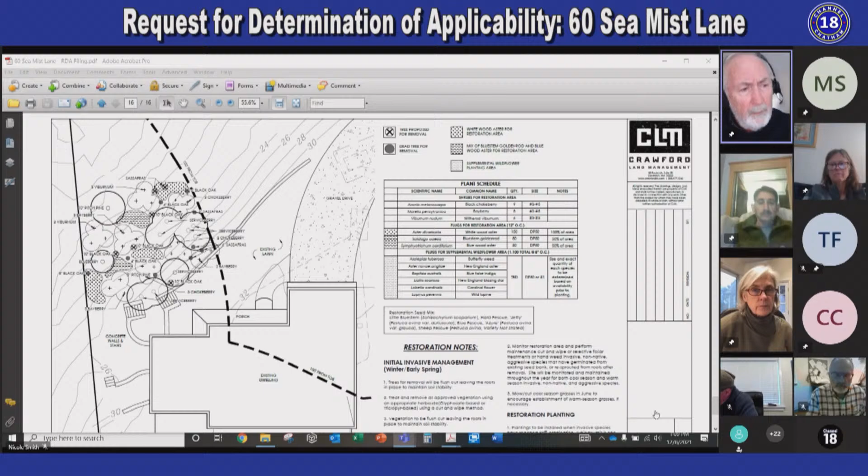I don't know, will we need to do this? I guess we don't need an RDA with any sort of conditions, or do we? I can't think of any.

I would say not. Okay, Bob. I'd like to make a motion that we approve a negative determination for 60 Sea Mist Lane.

Second. Thank you, Karen. Roll call vote. Bob, aye. Janet, aye. Karen, aye. Mary, aye. And I vote aye as well, and that is approved. Thank you very much, in record time too. Bye.

Next up, we have the request to amend an order of conditions for 571 Old Harbor Road, John and Amy Rhinelander, map 16H, parcel 44-C2, SE 10-3499. Proposed construction of a deck, pergola, and stairs. This is phase 1, so they're just asking to be able to file an amended order. We shouldn't spend much time on this. I will share the plan, and this is a George Riley filing.

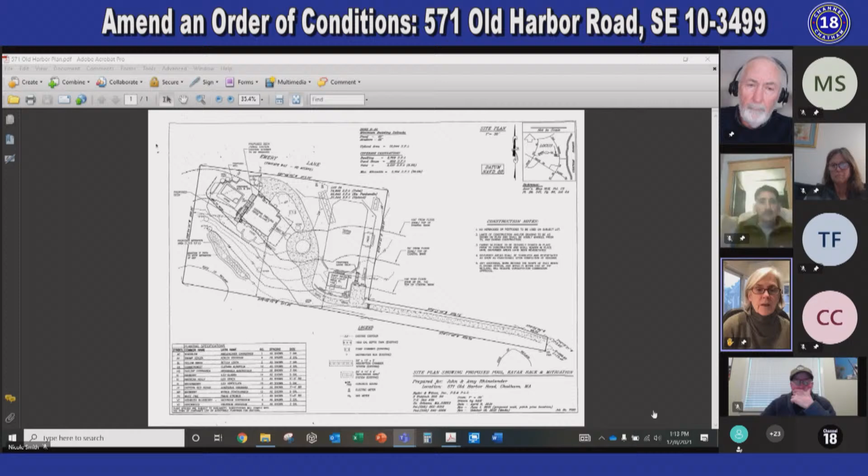Janet: I'll just note that I saw that increase and had the same reaction to it, but that's something we'll get into at phase 2, whether they'll be. Nikki just indicated that they're going to file a variance, I presume, for that increase, so we'll deal with that down the road. It just strikes me looking at it that it's well within the scope of the existing order of conditions, so let's have them move to the next level.

All right, so I think we can just go ahead and vote them on through to the next phase. They have to file, so it's up to them. I don't think we need to vote really. Well, I guess we have to approve that they can file an amendment. We have to approve phase one.

Okay, I'd like to make a motion that we approve phase one for an amendment to the order of conditions for 571 Old Harbor Road. Second. Roll call vote, Bob, aye. Janet, aye. Karen, aye. Mary, aye. I vote aye, and that is approved for phase one.

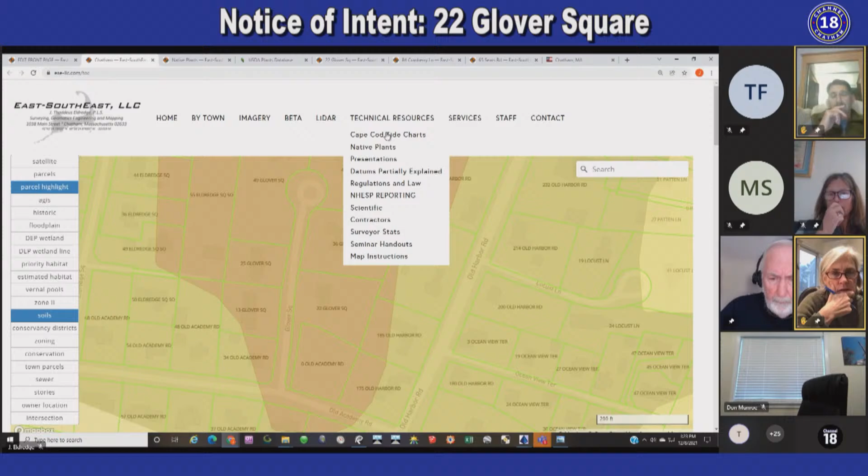So we do know we have some heavy soils out here. There's a patch of silt loam, all in the orange. Oh, I see. Well, the whole property is in that. The purpose of the drainage ditch is we don't get good flow out here. And that comes from the north and drains all the way down to this wetland. That's right through an area that's very silty. There's another perched wetland that's across Glover Square. So it's yeah, lots of clay, lots of silt.

So where does the drainage pipe start and stop? I saw the reference on the site plan. How's it expressed on there? The end of the pipe was located, and top of the drainage pipe located. So we recovered the pipe at the ditch to the north. I see, that's the top of the pipe here. We didn't spend enough time in the woods near the swamp finding the end of the drainage pipe. Right, everything's functioning right now.

So why do you want to replace it? It's an old metal pipe and it's showing signs of deterioration. The neighbor is most concerned that if it does deteriorate and then we get some rain, will he be flooded because this becomes a virtual dam? Yeah, the applicant sees this as the prime opportunity. If we have machinery there anyway, let's fix it.

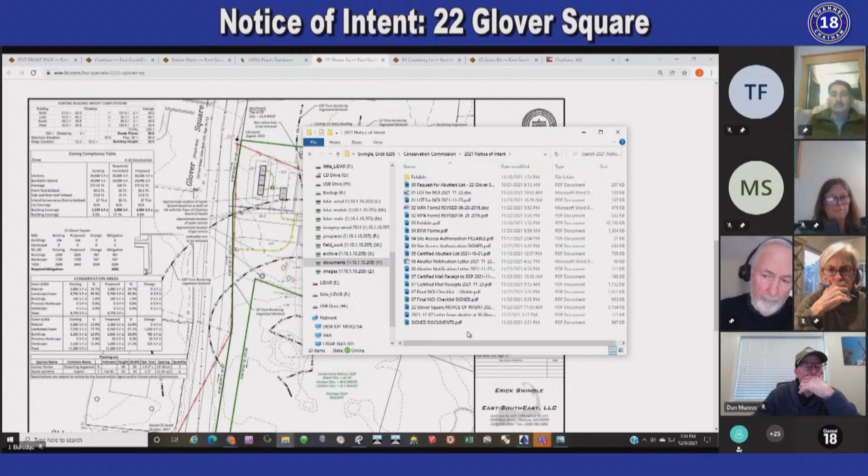Sorry, I'm looking. Well, I'll read it into the record, and then I'll get a copy of it. Oh, Nikki has it. No, now I do have it. It's pretty short, so I think we should just go ahead and read it. Would you like to have it? I don't know, I was hoping Nikki can do it. Go ahead. Oh yeah, because I'm just looking. I can do it, yep.

To whom it may concern, my name is Damian Webby, 36 Glover Square. My wife Charlene and I do not have a problem with our neighbor's project. We do, however, have a concern with the covered marsh drainage ditch in the backyard. Our concern is the drainage piping with the construction and the digging of 4 new plantings. We don't know what material was used for the piping and its possible state of fragility. A lot of water flows through the system, and a blockage would create flooding. Sincerely, Damian and Charlene Webby, 36 Glover Square.

Right, so Thad, just to summarize, what's going to be your approach to the pipe as you do the project? We want to take a look at it, run through a few numbers, and then return to the commission with probably an amended order of conditions to do something with it, either replacing it with a more sturdy and longer lasting pipe, or opening it up to a ditch.

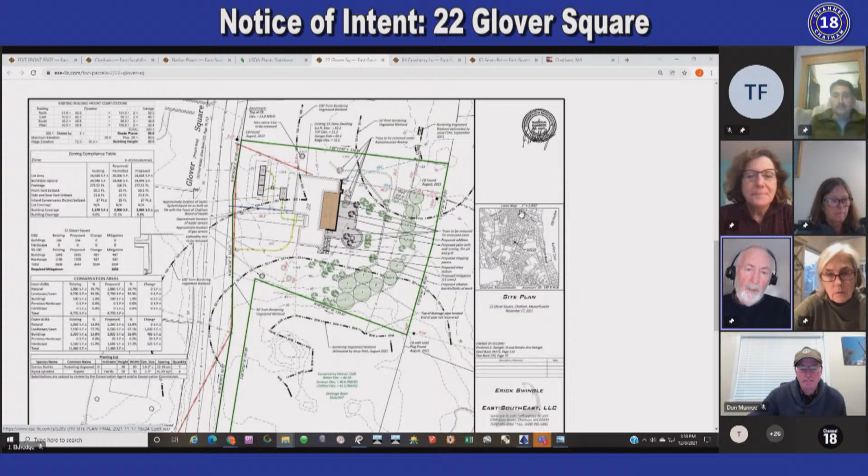The next order of conditions is 84 Cranberry Lane, Jeffrey A. and Susan L. Kittrell, map C, parcel 25-G21, SE 10-3521. Addition to a single-family dwelling, removal of stairs, and part of deck.

Good afternoon again. Thad Eldridge, East Southeast. The Kittrells are looking to add an addition onto their home on Cranberry Lane. The existing property has a salt marsh system against Sulfur Springs, a velocity zone coming onto the property, and an A zone up to a slope that constitutes a coastal bank. The entire property is within jurisdiction, and most of it's within the 0 to 50. So the Kittrells are looking to put a modest addition on their home that doesn't trigger full FEMA compliance.

This would be less than 50% the value of the current home. It would be an extension of their family room. Instead of the existing deck, it would be placed on Bigfoot sonotubes, resulting in the removal of the set of stairs at this end. They'll happily just use the one set of stairs and an access way to get into that family room. This constitutes a reduction in coverage, so no mitigation has been required. If there are questions, I'm happy to answer them.

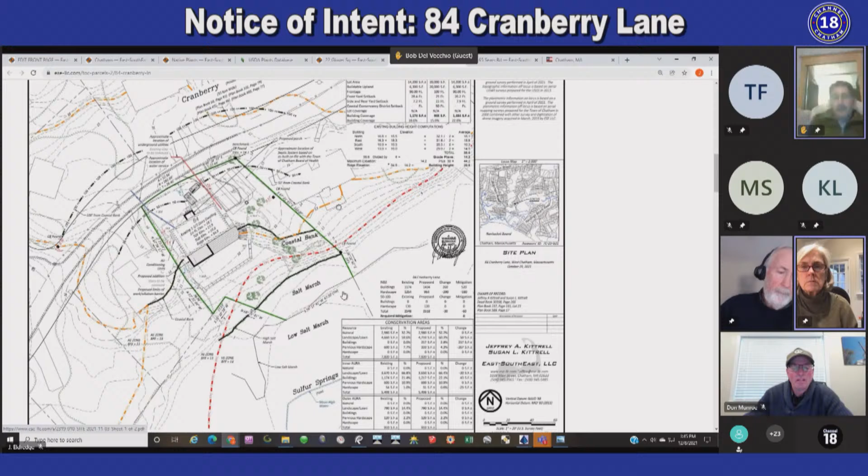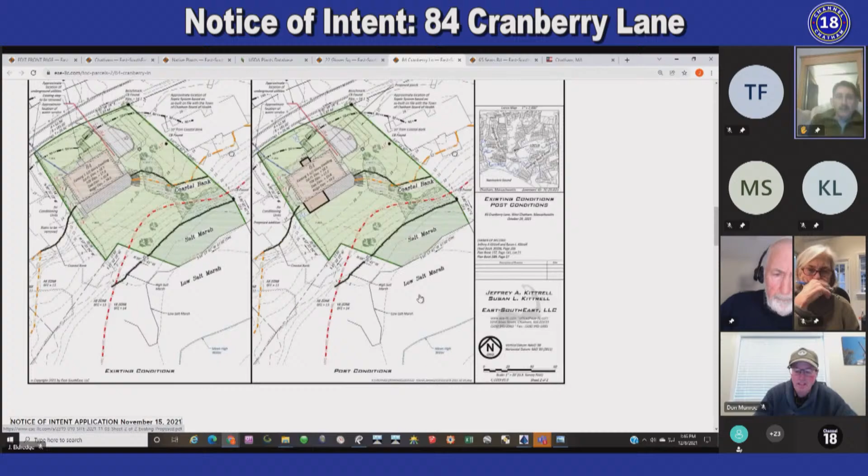Thad, I had a question about a couple of things out on the marsh. I walked out towards the marsh. There's an old raft, an old wooden raft, probably southeast of the property, out in the marsh. A couple of things showed up in the image, which is a few years old. And then there's another timber platform to the south, kind of where the property line cuts out, just out in the marsh, sitting there. I was wondering if those could be removed.

Technically the ownership of the property terminates up here, but we don't have a problem with going out there and picking up the debris that's floated in, taking that away. There'll be a dumpster on the site for the work.

Yeah, maybe you could hook up a chain to the excavator and pull them in. I'd rather get a few guys to pick them up rather than drag them through - that raft is probably really heavy, but the platform I think could be picked up by hand. The raft's going to be heavy too, unless you take a chainsaw to it and cut it up first. I'd rather point in that direction - dragging it back will probably scar the marsh up.

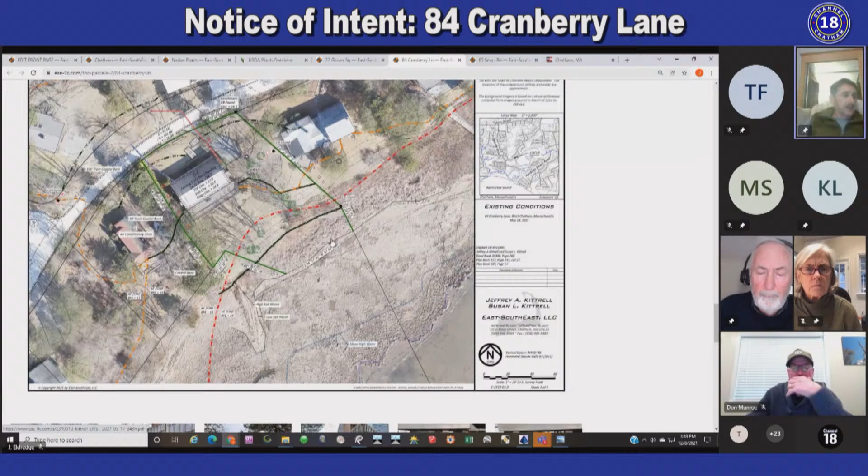Okay, I'd like to make a motion that we continue 84 Cranberry Lane to the work session on January 5th, 2022 for an order of conditions. Second. Roll call vote: Bob, aye. Janet, aye. Karen, aye. Mary, aye. I vote aye as well, and we'll see you at the work session then. Thank you. Thank you.

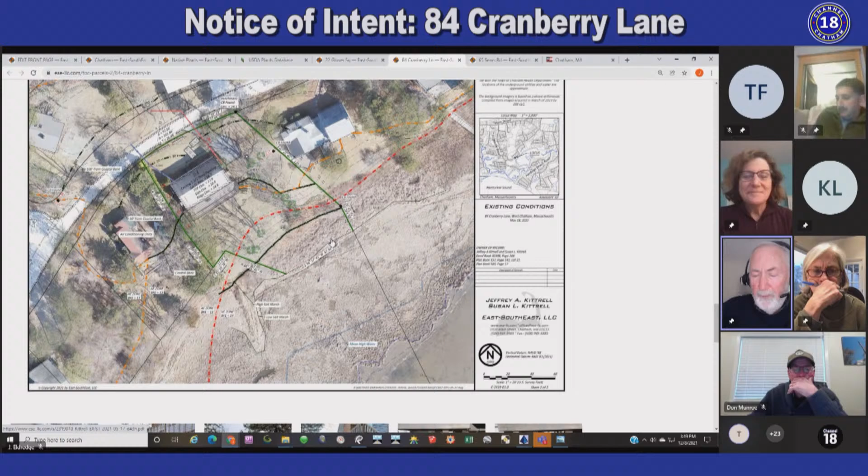The next notice of intent is 65 Sears Road, Sears Point Summer LLC, map 11A, parcel 2-J14. SE 10-3518, addition to a dwelling, redevelop hardscape, landscape, addition, and removal of fence and invasive management.

Hello, Thad Eldridge again. I'll leave after this one, I promise.

When we were last before you, there were a couple of odd and end questions. Janet was concerned about the areas. I provided a detail on the plan that shows the various areas. It's an odd shape, and I think that's why estimating visually what the areas are just doesn't look right. So we'll call it an optical illusion and carry on.

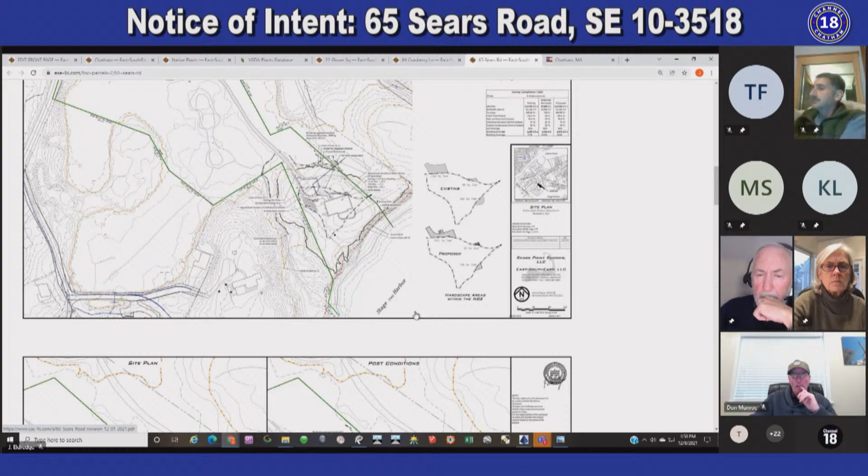As mentioned at the last meeting, we have more than ample mitigation to cover everything. We've added a detail of the fence, post and rail style with a mesh to keep the dogs in, a 6-inch spacing underneath, and then a metal edging so the dogs can't dig underneath it.

I provided an estimate of the amount of fill needed for the driveway. It's 38 cubic yards. And I've also provided an estimate of 120 cubic yards of material to come out for the foundation. We've provided the details of performance standards for the aura, and a landscaping list with the strict native species highlighted. If there are questions, I'm happy to answer them.

Thank you, Thad. Do you have any questions? Do you think you did address the essence of our questions? Bob has a question though.

Hi again, Thad. On the metal posts for the old fence that are going to be coming out, it was suggested that the metal be ground just to alleviate any sharp metal, for wildlife. Could we put a condition in the order for that? Yes, and I've actually thought about this since then. There are going to be a number of caps remaining from the tops of the fences. If we can't grind them, if we just cap what's left behind, that would safeguard the wildlife, and by the time everything rusts away to nothing, it won't be a concern.

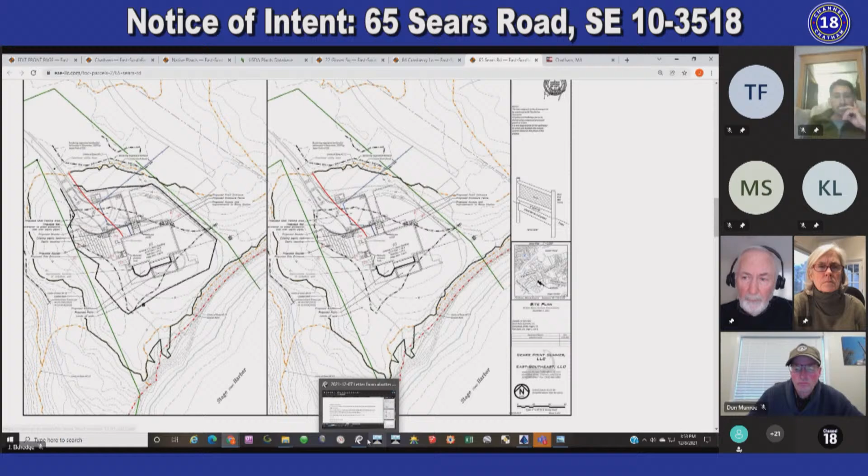Anyone else? I did have one. I may have miscommunicated on the question, which was the percentage. What I was asking for was a percentage of essentially foundation plants that are native, and I think what we got was a list of which ones are native, but it didn't specifically address our general rule of thumb these days for the outer aura foundation plantings to have roughly equal native and non-native at the very least. I'm not sure if that's what you heard. Unfortunately, now is that the outer aura, the inner aura, or?

Well, the inner aura, of course, should all be native. But in recent times, we have typically arrived at an agreement for foundation plantings in the outer aura to be half and half percentage-wise in terms of square feet. We can certainly have a plan set for the work session that shows 50% native versus 50% non. Yeah, I think that'd be terrific, and that would be consistent with what we've been asking others to do. Okay.

Without any other comments or questions, it would seem that we're ready for a work session. I'd like to make a motion that we continue 65 Sears Road to the work session on January 5th, 2022 for an order of conditions. Second. Roll call vote: Bob, aye. Janet, aye. Karen, aye. Mary, aye. And I vote aye. Thank you, Thad. Thank you.

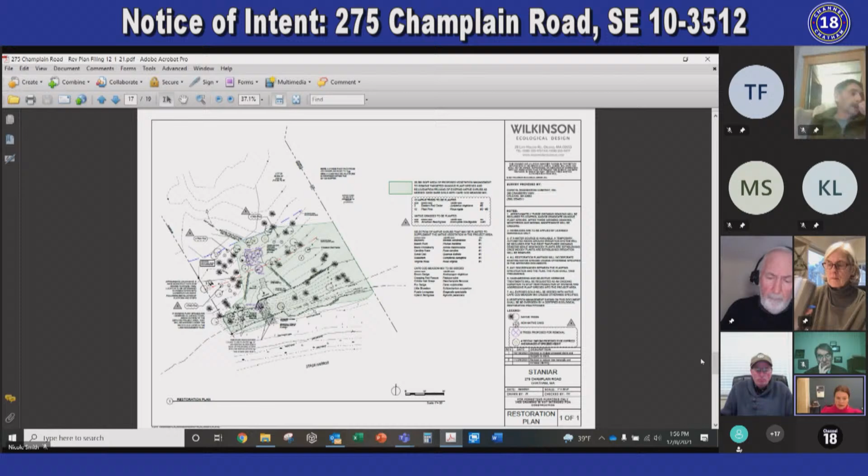We're no longer proposing to remove any English oaks, besides one in the area of the platform stairway that needs to be removed in order to clear all of the wooden debris. So there's only one English oak being removed; we're keeping all the other English oaks existing in the project area.

And we are keeping the cedar and the few oaks. There's actually one that's rather dead near the platform area, and we're not proposing to remove that either, so that would all stay. Like I said, instead of the 13 trees, we're now proposing 6 trees to be removed.

Secondly, one of the commissioners asked for a chart, and we provided that in the land management plan on the last page, page 14. It's a chart identifying each of the 6 trees, the species, whether it's a tree or sapling, and the reason for the proposed removal.

As mitigation for removing those 6 trees, we'd like to plant 12 trees: 2 eastern red cedars and 10 pitch pines. That's identified on our restoration plan, and it represents a 2-to-1 mitigation ratio.

Lastly, one commissioner had a question regarding planting along the proposed stairway. As shown on our restoration plan, we're proposing to plant American beach grass on both sides of the stairway to ensure that area remains stable from the very first day of the work.

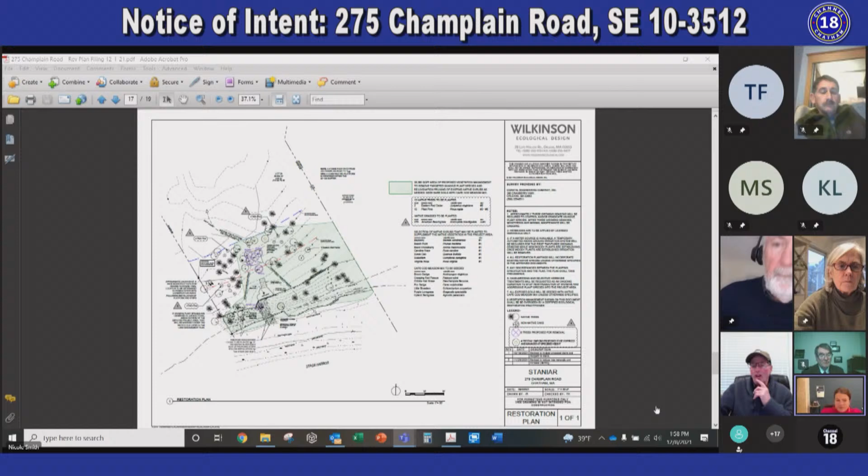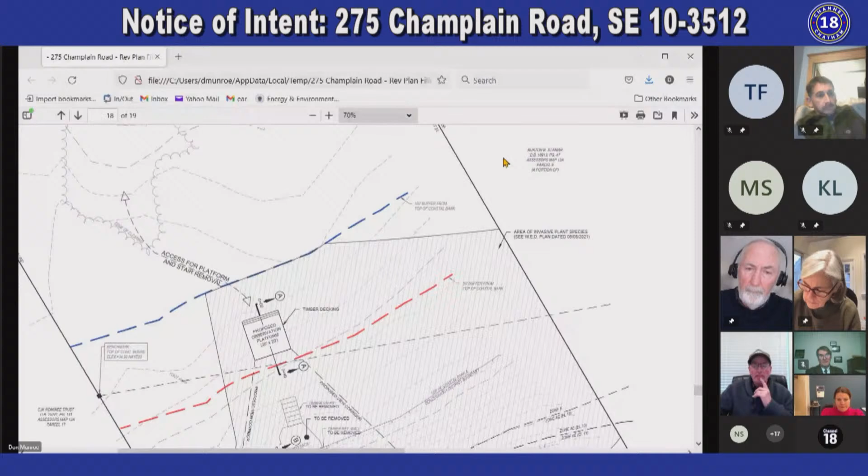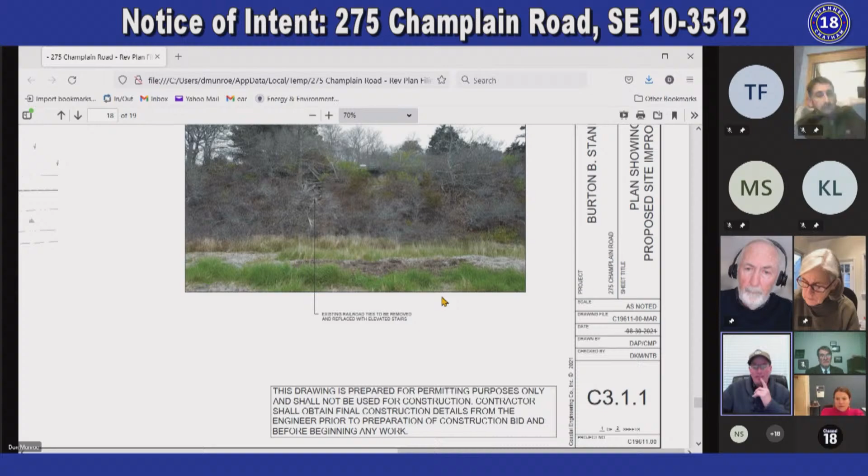Through the chair, Katrine, can I share my screen? There was some confusion about who was sharing, so it was unshared to allow Don to share his. After some back and forth trying different windows and files, the correct plan with the logo was finally displayed, and the commissioners confirmed they could see it.

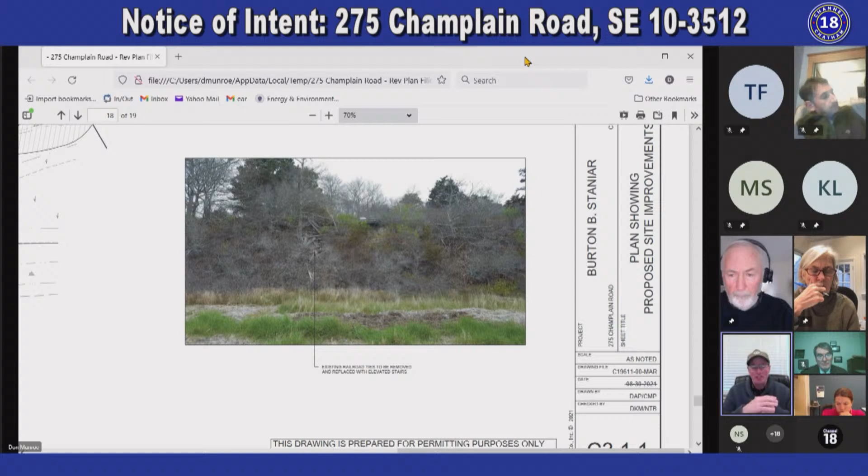I've got a photograph up on the screen. First, we did the same thing as Wilkinson: we took the suggestions and comments from the commissioners. One comment was that they didn't see a notation on the plan for the deck spacing. That note is on the plan in the section view on sheet number 2.

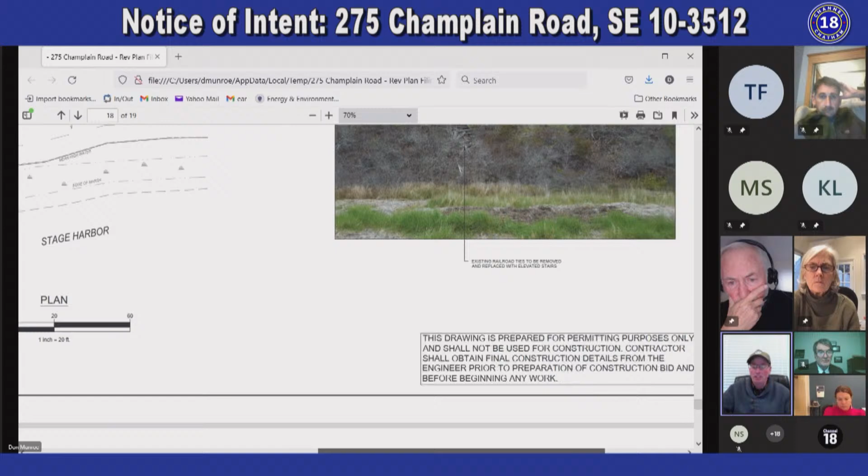In the framing plan, it says deck spacing minimum 1/2 inch. Also on page 1, there was a comment made about the materials. They wanted to make sure what the materials were. That's in note number 3: all lumber to be non-leaching, pressure treated, ACQ or MCA, or as approved by engineer.

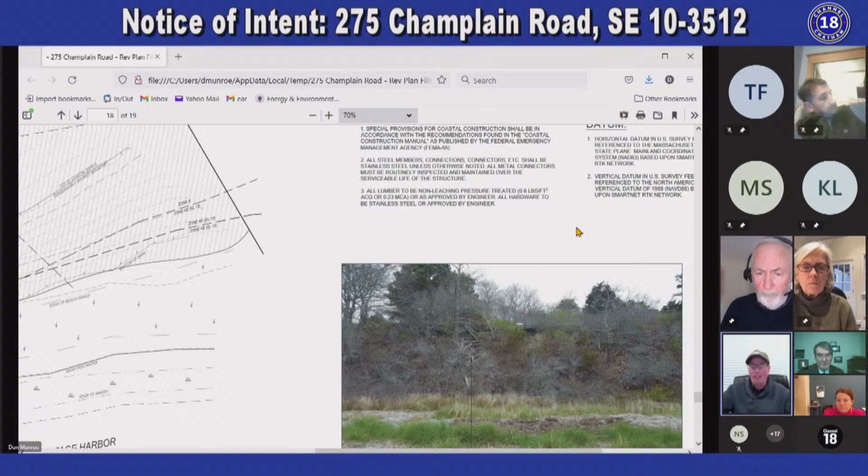Mike pointed out that in a revision to the plan, we shouldn't just say as approved by engineer, but as approved by the conservation agent, for any changes that might be made to the materials, because we don't want to leave it just to the ACQ or MCA. The owner may use cedar or some other material, but we'd want to run that by the agent when construction actually starts. So at the very least, we're seeking approval of the ACQ and MCA in this location.

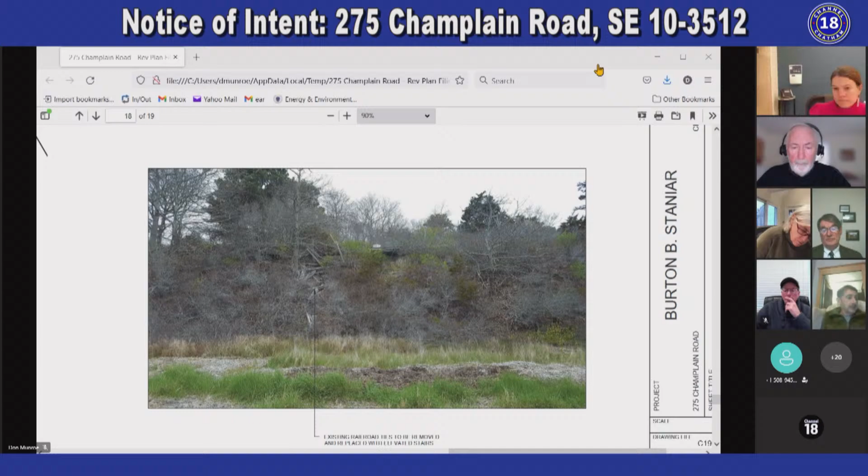So without further ado, I think that with what you provided allows us to move forward to an order of conditions. That would be in the middle of January, January 5th. I'd like to make a motion that we continue 275 Champlain Road to January 5th, 2022 for an order of conditions.

Next up, we have 368 Seapine Road, Beth Cressley Goldstein, map 13K, parcel 35A, H133. This is a proposed plunge pool and site improvements.

I spoke with John Schneibel recently, and he found out that they needed some ZBA approval, so they're going to work through that. But he did want to give at least a brief description and see if we had any major changes we would like to the plan.

Good afternoon, John Schneibel here, Coastal Engineering. Lauren Cronin, landscape architect, is here with us.

First of all, I didn't think there was anything with zoning issues, and I tried to get a contact with Sarah Clark, and she's not here today. I got this message yesterday. So when I looked at all of it, I didn't think there was, but well, I got to go see her and the building inspector and kind of hash that out. What's going on with all that?

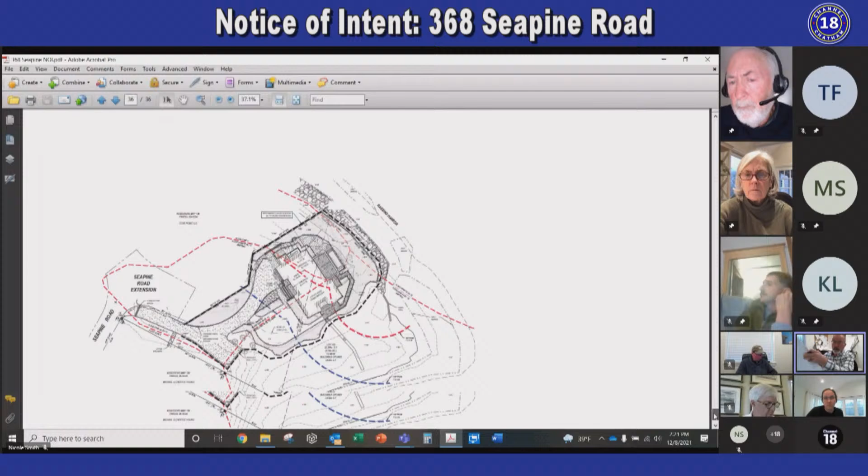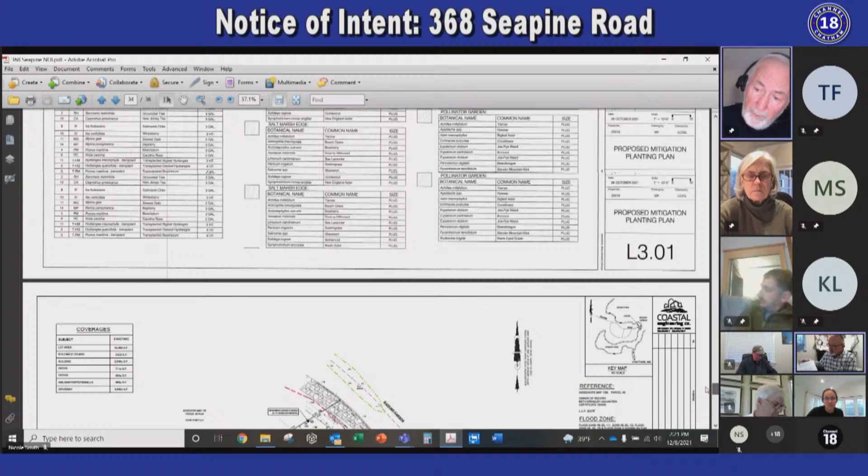This is the plan from Greg Lombardi Design. It says for permitting only. I think they all say that, but this is kind of more a blow up really of the mitigation plan. There's a lot going on here, so I think we placed that in there just for clarity. You have a mitigation plan labeled as such, you have a site conditions plan, and then you also have proposed site improvements.

I'm not sure what the difference is between... No, that's existing conditions, I'm sorry. Existing conditions -- the other plans are clearly marked. Okay, just let us know what that plan is about, if it's needed at all, et cetera.

Also, while talking about the plans, at least I'm a digital person, I don't get the paper copies, so sometimes this happens where some of the labels for resource lines disappear, and I think that's happened here for these maps. I see lines which are probably the 50 and 100 foot markers, I'm guessing, but they're not labeled as such. So all those should have labels where they don't exist -- this is the first two maps. Yeah, they're on the plan, at least the hard copy, perhaps. Yeah, the site condition plan has that.

Yep, I just don't see them in the digital copy. And that's where I think sometimes, when you save it as a PDF, unless you set the margins correctly, those will disappear. Well, Nikki brought up here -- you can see on our plan, the blue is the 100, and the red is the 50 from the coastal bank. And then in the colored maps -- the color maps do have them. It was the first one that doesn't. I see. Okay.

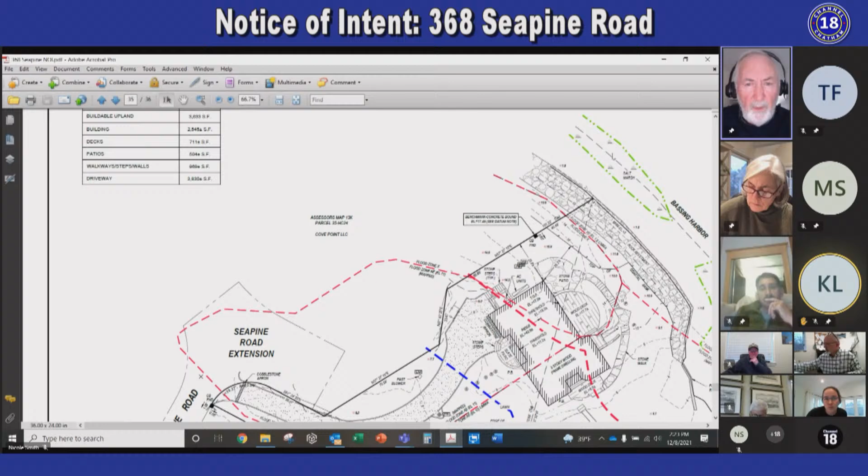Now, when I was there -- correct me if I'm wrong, but I looked at a lot of properties that day -- this is one where I believe there were a number of fairly sizable trees marked ostensibly for removal all around the property. And if my memory is correct, are those indicated on the mitigation plan, which is, I think, where they would normally want to be noted?

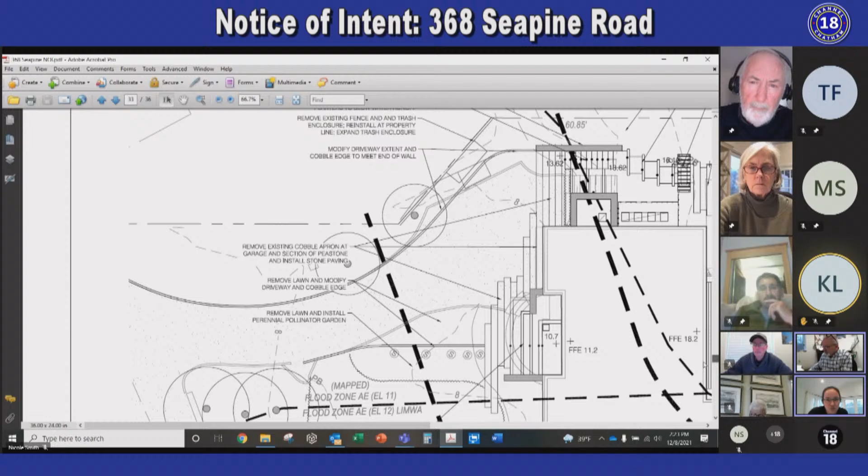Yeah, let me -- the only tree that is going to be removed is a river birch that's right up against the house in a planter on the north side of the house. There should be no other trees being removed.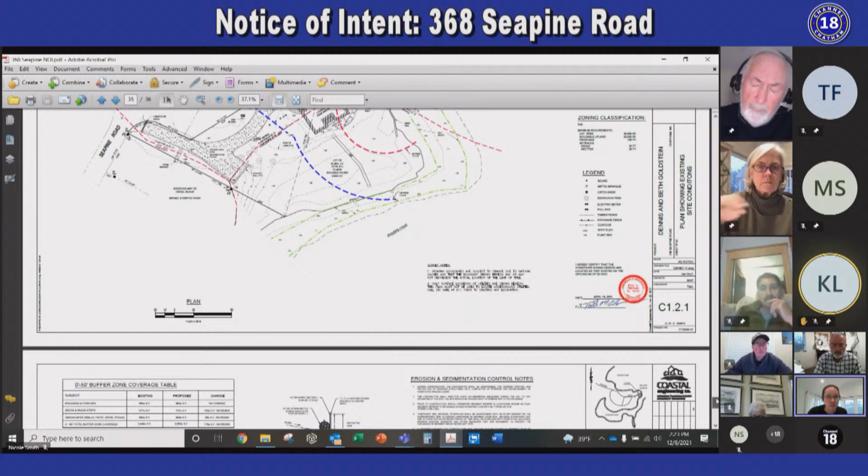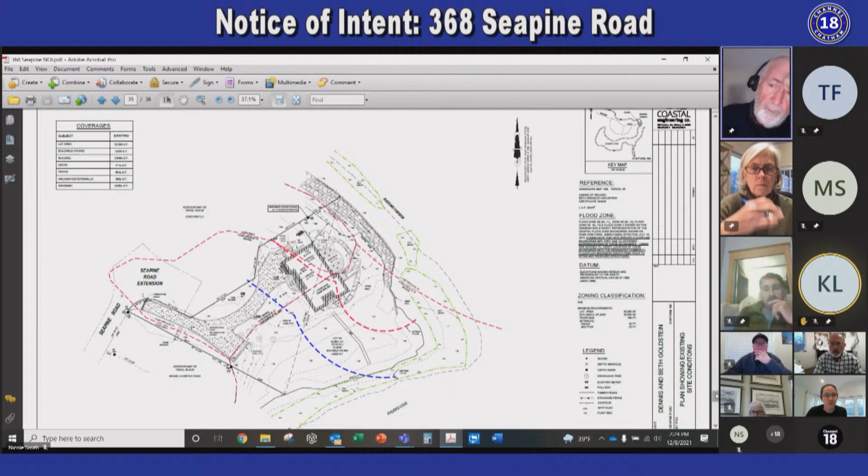All right, well, I'll ask my fellow commissioners when they speak whether they saw what I thought I saw, because my notes to myself were that there were a bunch of -- we marked all the trees that are substantial in size. As Lauren said, none of them are going to be removed except that one. Oh, so those are not to be removed? Okay. No, not at all. No, plan to keep all of those. Good to know.

And it says in the regulation to mark them with a -- I think typically when we see a tree with a ribbon around it, that's telling us it's proposed to be removed. No, none of those. Okay, so only the river birch.

Good, because that helps a lot. I was going to have something to say about that. Feel better already.

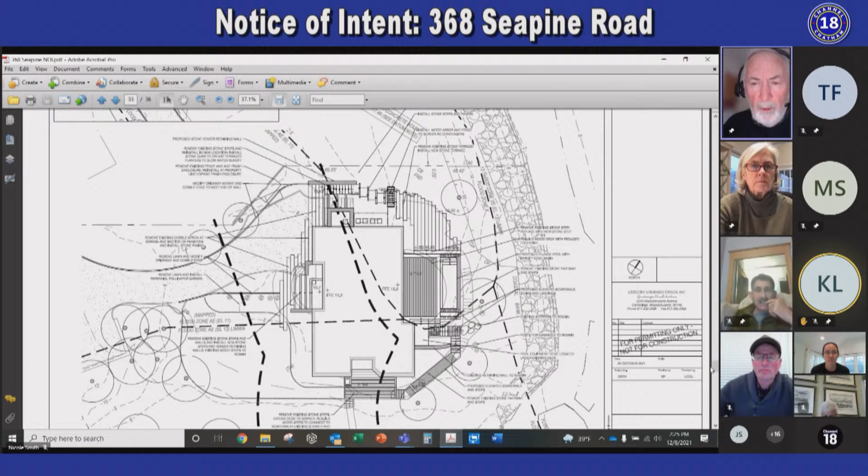And you are adding, I think, a serviceberry, 3 cedars? Is that correct? Yeah, there's a serviceberry and I think 3 cedars on the north property line.

That's all I have for the moment. I'm just going to go to the hands up, and that would be Karen. I just have a couple questions. The modifying of the driveway, what sort of materials are going to be used for that?

Well, presently there's stone, it's going to be the same. It's no different than that grass that was there. Okay, Lauren, right?

You say you're installing new stone steps and veneer retaining walls. What is a veneer retaining wall? It's a wall that has a concrete footing and core to it, and then the field stone is applied to it. Oh, okay, all right, I just wasn't familiar with that verbiage.

My next question is the boardwalk, the elevated boardwalk and the deck. What materials are going to be used for those two things? The surface will be ipe, to match the existing decks that are there.

Yep, and there's a lot of grass growing to the edge of that. Will that be protected when the construction is in progress? Yeah, the goal is to keep as much of that grass that's growing there as possible.

The idea is just to pull up the stones and insert the walkway. Okay, and if it is damaged, that can be replanted? Yeah, the mix we're planting back includes those same grasses. Right. Yep. Okay.

And there's just one river birch. I had the same concerns that Bob had about the trees. I saw them all flagged and was wondering if they were going to come out. No, sorry, Lauren. There's just one river birch on the edge of the house that will be taken out because it's too close to the house. Is that the story? Exactly. It's in that existing wall by those AC condensers, and it's just overgrown, too big for its location.

I think those are the only questions I had at the moment. Yeah, there's a lot going on, that's right. But no addition to the building at all, this is all kind of accessories to the dwelling itself. So it's all hardscape. Yeah, okay, thank you. Yes, thank you.

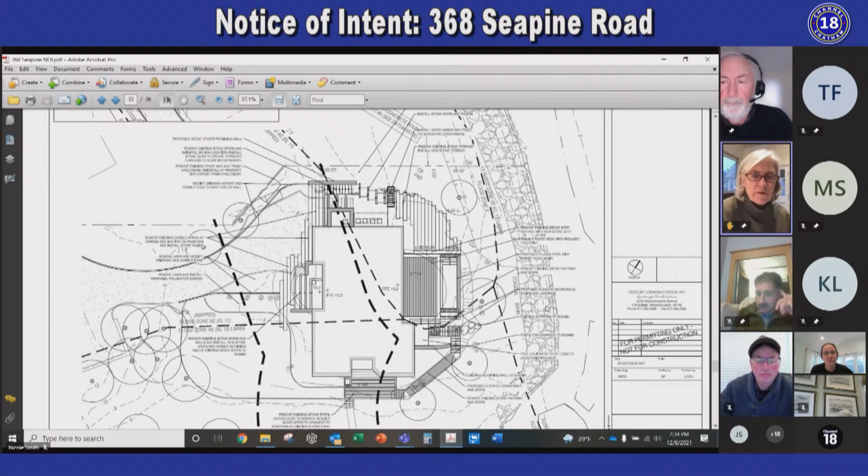Oops, Janet has a hand up. I spoke too soon, no, not alarmed, just flipping back and forth between these plans. I didn't hear anybody ask about the new stone terrace that's going to be installed on the north side of the wooden deck pool. Is that dry laid? Yes, it is. It is dry. Okay, just me. Thank you.

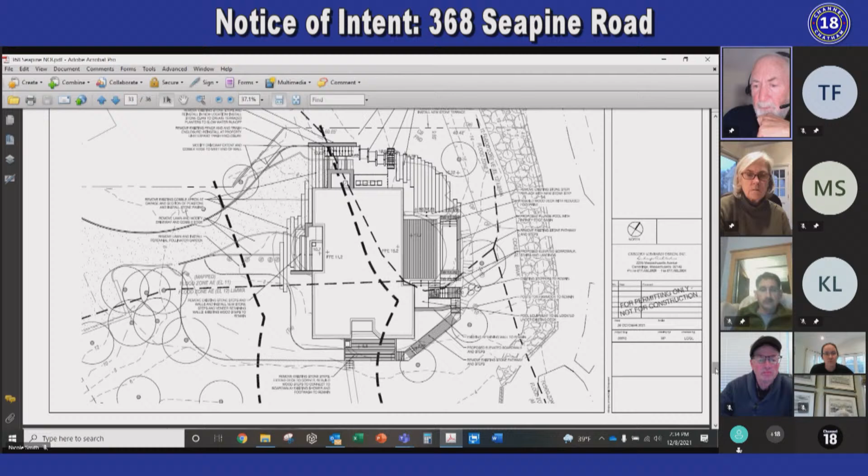All right, so I don't think we have a whole lot of requests for changes, just the technical changes I pointed out regarding the plans, with the resource labels, with the plan with no name. What else were people asking for? I don't recall anything. We've gotten clarity on the fact there's just the one river birch coming out, all those other great trees are just tagged for some other reason.

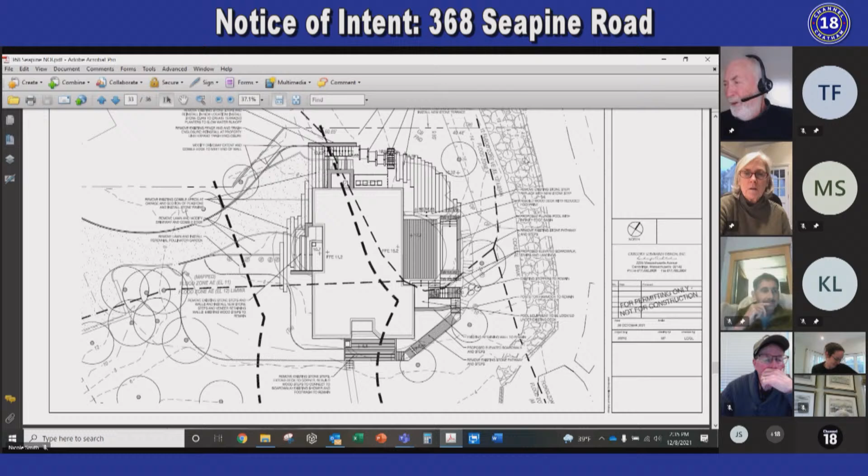Well, I'll go through that. It says when you mark the following areas with colored tapes, all it says is any trees or branches over 2 inches in diameter must be flagged with tape. So, oh okay, so we took that literally. You did what you read, okay, we tried to follow the rules. It's just apparently you're the only one who follows the rules. Anyway, I know, I'm sorry.

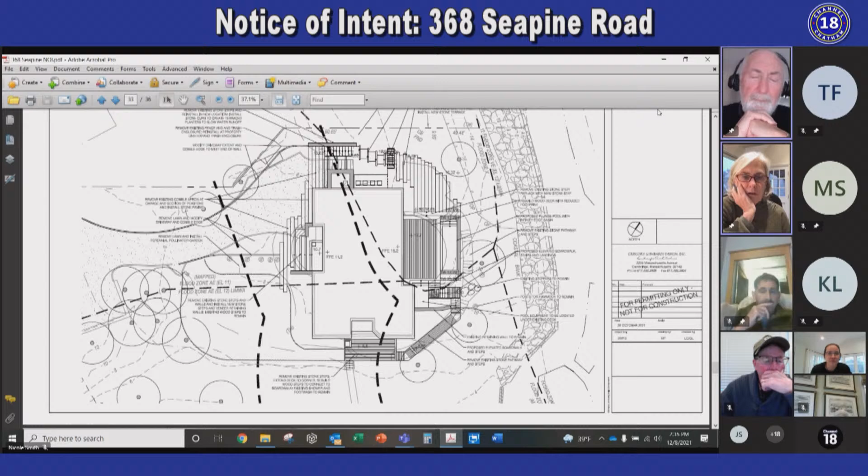Just one other thing as you're making the list, Bob. I know we talked briefly about how this pool is a preformed pool that will be lowered into an area that will be excavated to hold it. Since all of this is happening in the resource area and the staging of the crane, I would like to see a bit more detail on the construction protocol and how that's to be done. Yep. And how the coastal bank will be protected from any disturbance during that construction. Yep, I'll give you definitely a detail on that.

Thank you. And you're picking up a 30-foot long pool and hoisting it over the house and dropping it down, that's some process. Yeah, we've done that a number of times. Everybody wants a pool, so we're... No kidding. Don't we know it, sometimes I think it's the bane of our existence here.

Okay, so we have requests for additional documentation, but we don't seem to have any requests for any substantive changes to the plan. So that would lead me to say that we're in position for a motion to go to a work session.

I'd like to make a motion that we continue 368 Seapine Road to the work session on January 5th, 2022 for an order of conditions. Second. Roll call vote. Bob, aye. Janet, aye. Karen, aye. Mary, aye. And I vote aye. See you at the work session. What was the date again? I'm sorry, January 5th. Okay, fabulous.

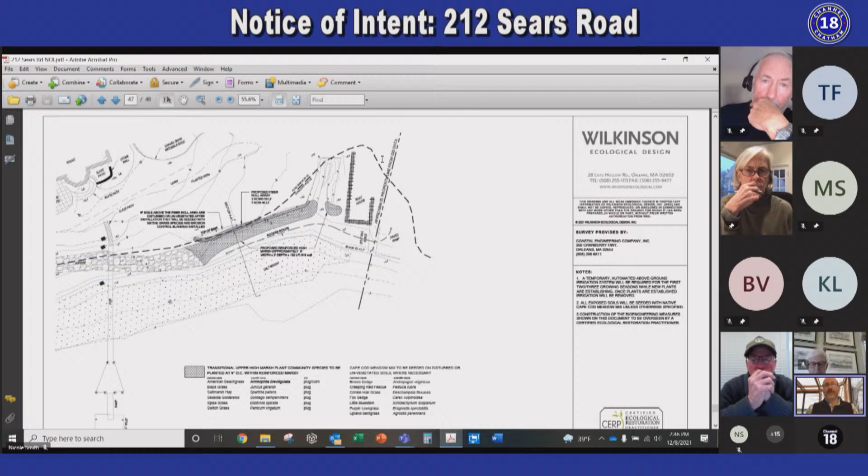So the goal is to reestablish a high marsh community. The low marsh is fairly well represented here. I think the reason for the diminishing of the marsh in this location is it's a high use area — a lot of folks leaving in dinghies to go out to their boats, fishing and shellfishing, etc. So looking to restore the natural functions of the property, we thought we could best be served with a high marsh approach.

There'll still be some beach between the existing marsh and the proposed marsh. I don't think there's as much foot traffic along this stretch of shoreline, but that is certainly still afforded. Where the beach walkers go is essentially where the construction access would be. We can generally install these interventions with just a small mini excavator and a small track loader to bring in the materials, very similar to the project at 157.

This marsh is a little bit wider — we're going with a 9-foot wide marsh rather than a 6-foot wide marsh, so we can have a nice gentle slope up to the coastal bank landform.

Not all of the coastal bank even needs fiber rolls — we're just working with the existing grades. This is a lower bank than some other portions of this shoreline, so we're transitioning from the marsh up to 2 fiber rolls at the highest point, tapering down to 1 as you get closer to the boathouse. On the other side of that little drainage area adjacent to the boathouse, the land is quite low, so we don't need any fiber rolls at all.

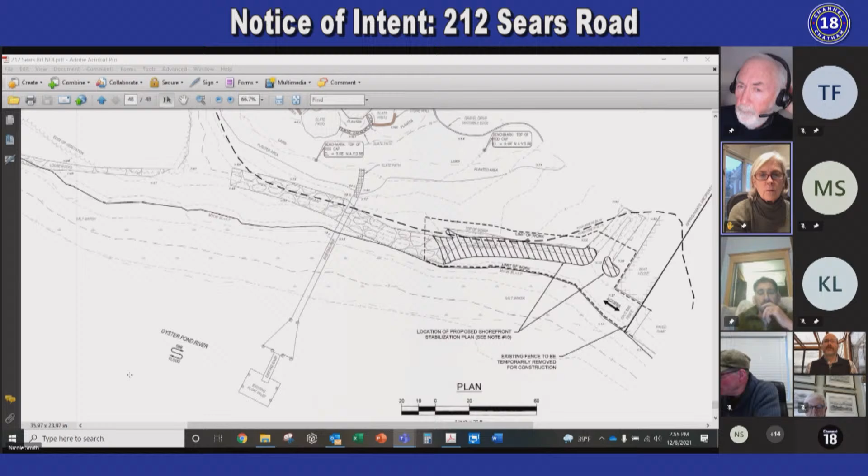Well, what happens to those plants? Are they removed, and what happens to that order of conditions?

Sure, I'm happy to take a stab at that, and if Nikki wants to add anything, by all means. We're only proposing to restore areas where all the vegetation has been lost presently, so we wouldn't be going landward where there is some native vegetation established. I don't have a lot of firsthand experience with that. We hadn't worked on the prior vegetation program, but I don't see the two as being mutually exclusive. We would just be knitting together the two areas so everything's fully naturalized.

Okay, just because I'm looking at the planting plan from that order, and it's showing installation of plants going below the top of the bank down about two-thirds of the way toward the bottom. So did those plants go in and then they didn't survive?

Yeah, so that's sort of the reason why we're here with this project. In our opinion, vegetation alone, which I think was in the coastal engineering alternatives analysis number 3, was successful in the flatter locations and the areas where there is a section of revetment, as you can see on the plan. Above that, where the toe is stabilized, the vegetation was able to take. We're looking to stabilize the toe with a much softer approach here using a salt marsh, but we're confident once we do that, we'll be able to stabilize the area above.

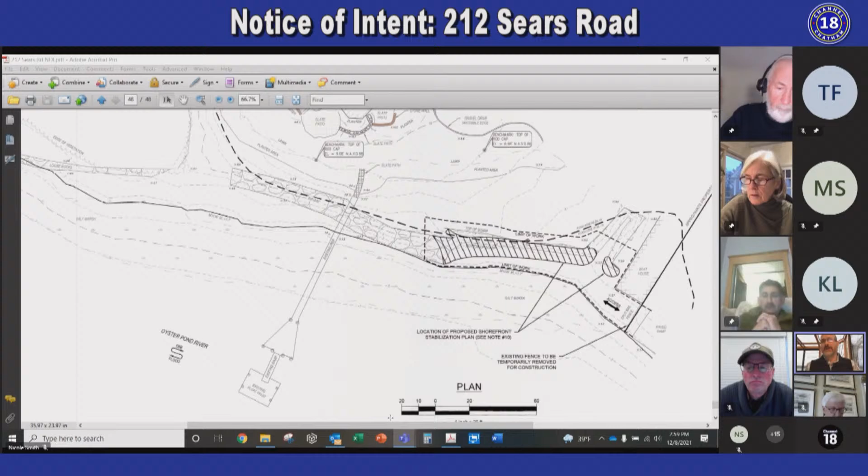Okay, one last question: along this bank, I'm not sure if it's exactly in the area you're talking about, but there are a fair number of good-sized rocks, large cobble or small stone rocks embedded in the coastal bank. We had made a finding before at the last one that they were actually helping to stabilize. Are they being removed as part of this and replaced with the fiber rolls? In the footprint of where the hatching is showing, they would just be incorporated into the marsh. So yeah, we're just looking to build marsh around the existing cobble, and then supplement the cobble as needed. Okay, great, thank you so much.

Thank you. Thank you, Janet. Seeing no other hands, I will just opine about a couple of things.

This, I will admit, when I was there, I didn't quite understand. So the purpose of the project was stated as being to prevent erosion of the bank, and when I was looking at it, it didn't necessarily seem to be a great risk. But I'm not a professional, so that was just the first thing that occurred to me when I looked at it. Compared to a lot of banks that I see, this didn't seem to be eroding. But I don't know if you have any thoughts on that, Seth.

Sure, I think it's somewhat a perspective issue because the bank is just not that tall. But in the central portions of the project area, right up to where the existing cobble is laid upon the bank in riprap fashion, it's a near vertical face, and that vegetation has been lost. So it doesn't take much of a storm at this point to really erode that shoreline back. Given that this house isn't too far from the coastline, we thought it was imperative at this point to try to stabilize the embankment as quickly as possible.

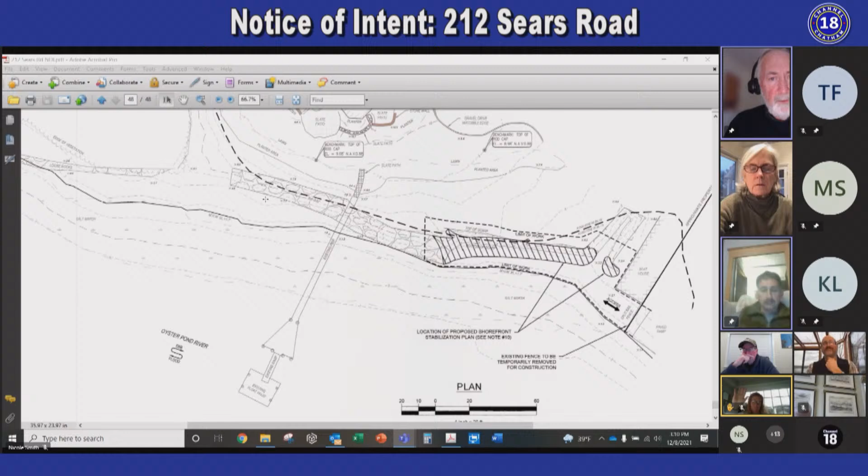Teresa, are you speaking about, wish to speak about this? Hi, yes, good afternoon, Theresa Sprague with BlueFlax Design. First of all, I just wanted to talk a little bit about the previous project.

The previous project was proposed mainly to manage invasive vegetation, not to stabilize. The area was overrun with invasive vegetation, and we were restoring native vegetation there. At the time, Mr. Murphy had contacted us because he was concerned about invasive vegetation moving into upland portions of his property managed by Schumacher, who were unable to hold the invasive species at bay. So that's what we originally proposed.

I recall there was a question at the time regarding the cobble or stones on the bank and how long they'd been there. It was determined, after reviewing historical satellite imagery and aerial photos, that they had been there for quite some time. Mr. Murphy himself provided testimony from previous owners that they had been adding to it many years before the Wetlands Protection Act came to be.

We did not propose planting. I was reviewing the plans as Seth discussed the area where they're proposing fiber rolls, and I was a little confused because what looks like a revetment on the current plans isn't shown as such on the plans previously done by J.M. O'Reilly. But we did not plant in that area specifically. Most of our planting was within the 50-foot buffer, not on the coastal bank itself. We were generally managing invasive vegetation there and letting existing native vegetation reestablish.

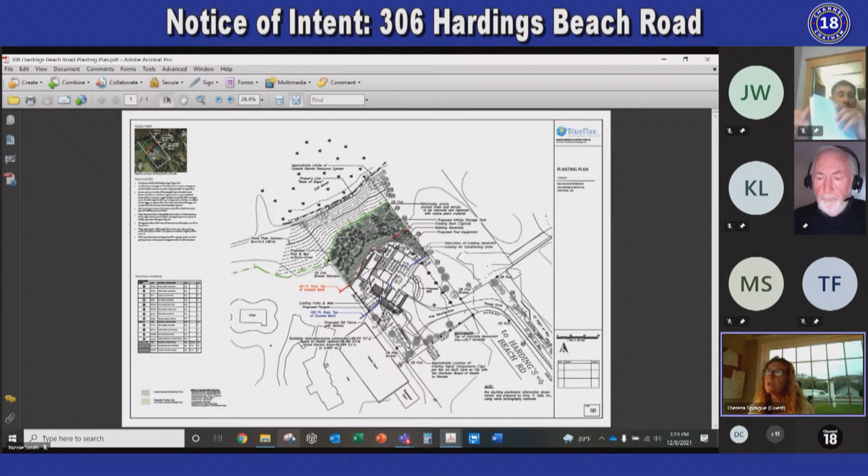So we're proposing to manage approximately 7,040 square feet of this area within the buffer zone, remove invasive vegetation, and revitalize existing native vegetation that we uncover in the invasive species management process. We are going to support the existing canopy-sized trees, perhaps with some regenerative pruning. However, the trees have been pruned quite significantly over time, so I don't think they need any regenerative pruning at this time.

We'll be restoring the area with 135 native shrubs, 217 perennials, and replacing the area right off the pool with a number of bearberry and low-growing ground cover species. We are proposing to plant out as much of the 50-foot buffer zone as possible. We'd like that 50-foot buffer to be entirely vegetated.

However, recognizing that we do need some access and circulation to allow for maintenance around the front of the pool, or to the north of the pool, we are proposing to leave a small strip of lawn, which would be a fescue clover lawn, so there's an opportunity for property owners to maintain without stepping on or damaging the shrubs we're proposing. We're not proposing to plant right up to the edge of the pool. So with that, I'm happy to answer any questions about the proposed mitigation and restoration.

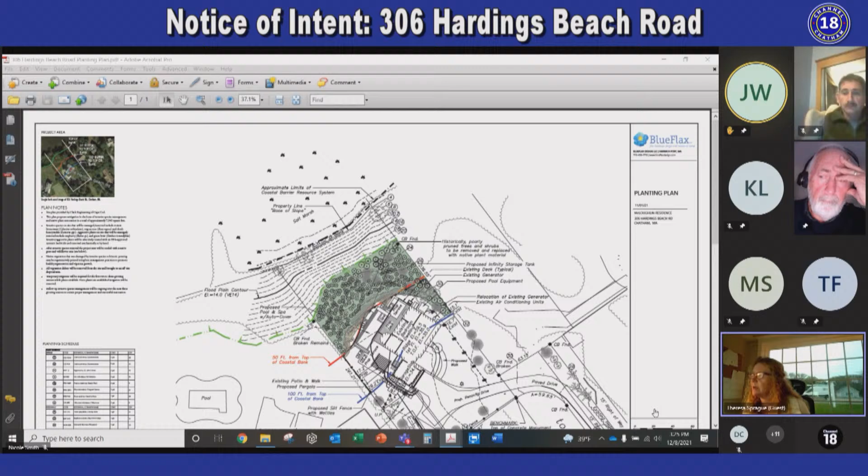Teresa, can you characterize the NDZ, with the exception of the strip needed for a fescue lawn for pool maintenance access? What is the current extent of invasives in this area? Looking at the photos on page 4 of the land management plan showing existing conditions, we have canopy pitch pines mainly toward the eastern side near the edge of the 50-foot buffer. Moving west, there are pitch pines cut to about 4 feet tall, and further west the vegetation is mostly invasive, a mix of rugosa rose and honeysuckle, all covered by bittersweet vine. That's the transition edge between the lawn area and the vegetated area.

So the photo on the lower left is representative of that western side. Correct. And those canopy pitch pines are not slated for removal? Absolutely not, those canopy pitch pines will remain. You can see them on page 4 in the upper right-hand side, the existing canopy pitch pines.

If you scroll up to page 3, the top photo shows the pitch pines that have been cut down to about 3 to 4 feet, completely covered with bittersweet vine intermingling. Once we get outside the 50-foot buffer and onto the coastal bank itself, we have a native plant community that's in really good health, so we're not proposing any work on the coastal bank, just within the 50-foot buffer to restore that area.

So at the end of the day, the existing 50-foot buffer will be transformed into a vegetated buffer strip, with the exception of the small lawn area for pool maintenance access. Yes, that's the goal of the plan. No lawn will remain in this area. So the lawn is being replaced partly by a pool and the rest by mitigation plants. That's correct. Okay, well that's better. Thank you, just needed to clarify that.

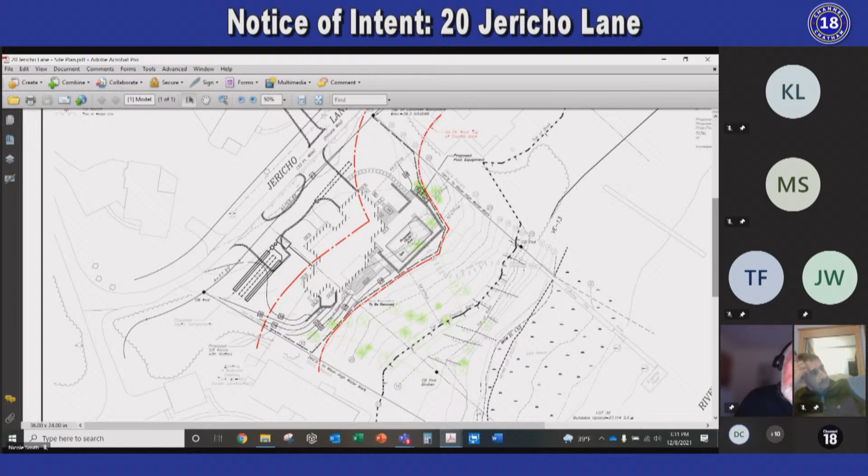To that end, Teresa has developed a new restoration mitigation plan for areas of the lot closest to the river. The resource areas are basically the buffer zone or coastal bank. I think most of the work is outside the other buffer zones, so we're strictly dealing with the buffer zone or the outer area to the coastal bank. If there are any questions on the engineered plan, I'd be happy to answer them, but Andrew and Teresa are here to talk about their work.

Thank you, David. Yeah, as with the last project, I think it helps just to hear from everybody for all facets of the project, then we can dive in.

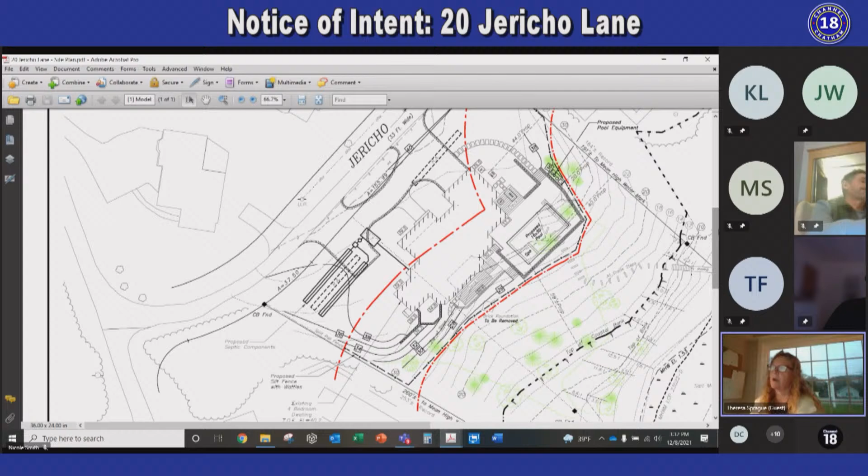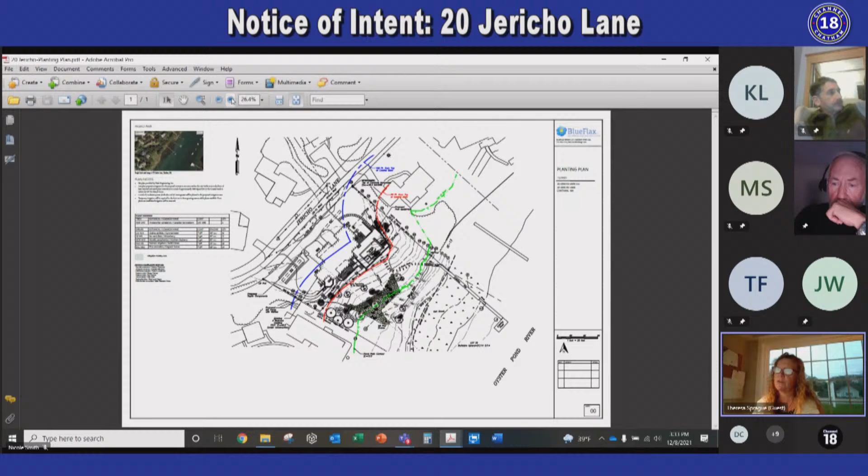Sure, Theresa Sprague with BlueFlax Design. One of the wonderful things about this particular lot is that there's no invasive vegetation to speak of, so this is really an opportunity to improve the vegetated buffer and some small areas of the coastal bank that are currently existing lawn. We're proposing to plant out the area shown in green, with 124 shrubs, a mix of species existing on the site, including bayberry, winterberry, holly, clethra, with some switchgrass that's also existing down at the edge of the salt marsh.

In addition, along the southern or southwestern property line, we are proposing to plant amelanchier, some understory trees, as well as additional bayberry along that western property boundary. What's currently a mowed area dips down into the coastal bank, almost to the edge of the salt marsh. We'll be entirely revegetating that area and creating a vegetated buffer strip landward of the top of coastal bank within the 50-foot buffer. The area we're proposing to plant, removing Cape Cod lawn and planting directly into it, is 1,880 square feet.

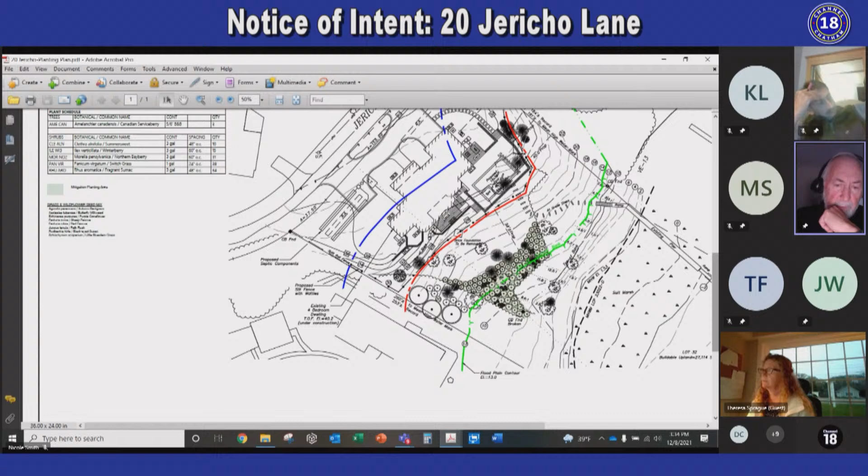Okay, thank you, Teresa. So, I guess maybe it's my turn to start again. How did you choose the boundaries of this mitigation area?

Basically, I was looking at mitigating the increase in structure at a 2-to-1 ratio and really looking at the vegetation existing on the site. You can see the area shown as the edge of vegetation, with the at-grade steps that lead to the existing ramp down to the pier. That edge area is entirely vegetated, mainly with bayberry, some clethra and some winterberry holly, and similarly to the west. So I was looking at connecting those two areas and revegetating the lawn in between the vegetated areas, both north and south, so that we have a continuous, unfragmented vegetated buffer to the coastal bank.

Okay, my memory is a little faulty on the way the property looks. Between the proposed mitigation area and the 50-foot line, what is there? Is that Cape Cod lawn? It is. It's Cape Cod lawn with canopy trees, oaks and pitch pines. So you're not too worried about invasives taking over this mitigation area because there aren't any there already. There are not. This area is really healthy native vegetation, including the grasses that are part of the Cape Cod lawn mix. They're mainly native grasses.

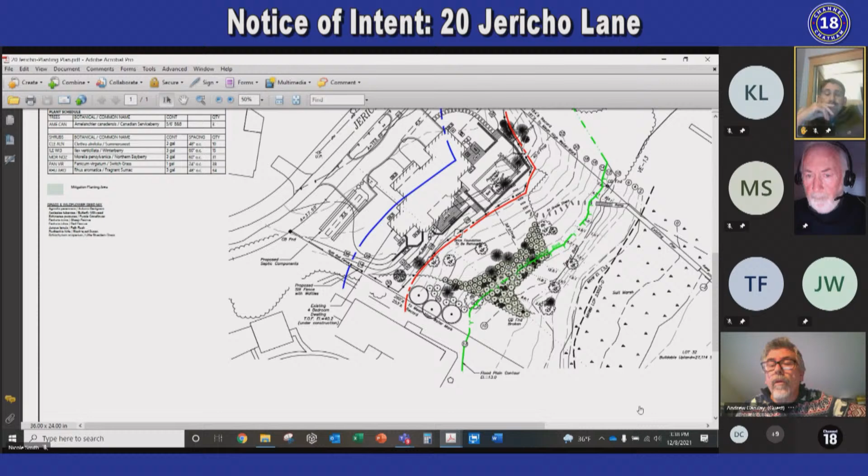So I had a different limit of work line, I think, than the Clark plan had, maybe. I'm not sure. Can we put my plan up there, or turn it loose so I can put it up there? I can't point onto that plan. So I'll go ahead and post mine. Yep, go ahead. Okay.

Okay, you can see currently there's no trees in that area. However, like I said, they were there - let's see if I have the other plan. Yeah, these trees are not there. I don't manage the job, so I don't know why they were taken out, but they are not there. Actually, I cleaned up this drawing, so that's why there's nothing shown here for existing trees, but there were 2 or 3 trees right in this area. You can see these trees right here are not there.

So as far as you know, those are the only trees that were recently removed within the project area? Yeah, I think they got removed when the construction first started. I think it was probably an accidental thing, because you can see, if I show you again, my limit of work comes in front of those trees. I believe the original site plan might have had the limit of work line behind those. I'm not sure what happened with that, but they're just not there right now.

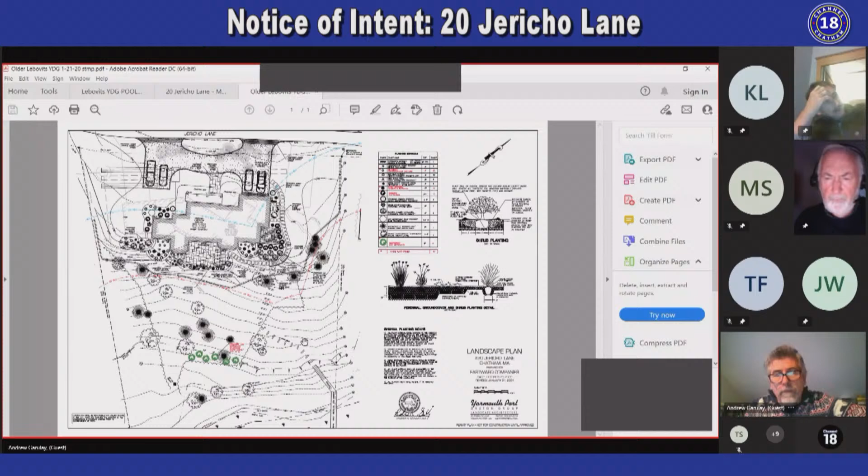Okay, the other thing is the current steps down to the bottom of the hill, to the coastal bank. They kind of end up right at the center of the pool. So will those stairs be changed? Yeah, they'll remain, so that you would walk down the steps and come around the front of the retaining wall for the pool, and then catch whatever's left of that walkway.

I'll show that again, maybe zoom in on that too. So whatever's left here, the pool area is going to be roughly here. So everything outside of that 50-foot top of coastal bank setback will all remain. That will still be the way to get to the pier.

I can comment on that, Andrew. Sure. David Clark here. We will be filing shortly another notice of intent to move the dock. The owners realize the dock is somewhat dilapidated. The previous owner didn't take very good care of it, so it needs rebuilding. We thought that was a good time to make some substantial improvements in the location, configuration, and design of that dock.

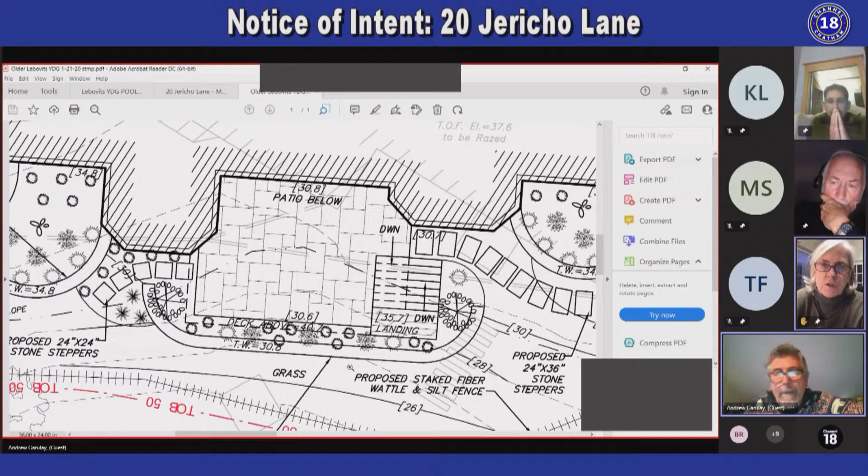Correct, so what really counts for our purposes is the patio. This is the old plan that was approved we're looking at right now, but that's what's showing on the current landscaping plan. Just noticing that David's site plan and Teresa's planting plan don't seem to indicate the existence of the patio - they're just showing the deck, unless I'm not finding those lines.

Our plan actually shows roof extending from that bump out on the south over to the northerly bump out - that's a roofed area above the first floor deck. So Andrew is showing that area as patio because that's what's proposed at ground level. Our plan shows a bird's eye view, and Andrew's showing what's happening on the ground.

I just want to make sure that when we approve the final plans and file them of record, all three plans are consistent, so that when the certificate of compliance time comes around, it's clear what's supposed to be there.

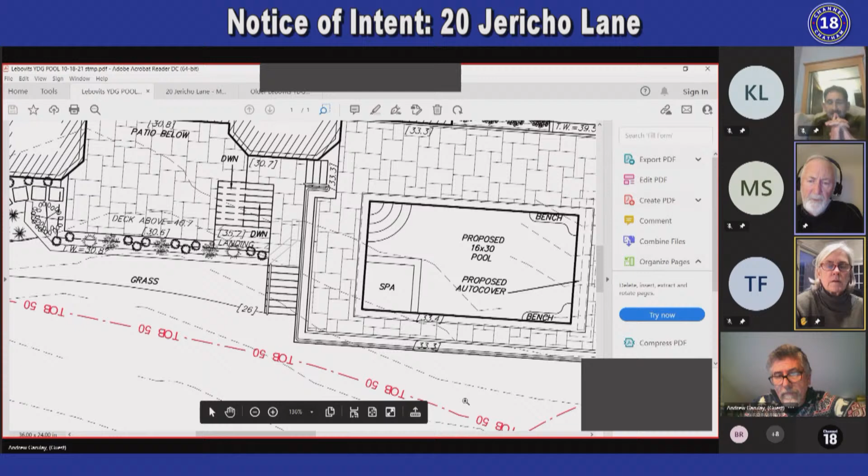No, it never is. I was going to talk to her about demarcation of this mitigation area. I know she says there are no invasives in the area, but I wanted to discuss whether demarcation of that would be useful. I think it might be, since it's essentially the only mitigation area on the property, but perhaps Bill, go ahead.

Sorry, a demarcation of the mitigation area - okay, we would put that into an order. It's coming up against lawn, so you'd want to make sure that's carefully carved out. But they're also going to come back with an accounting for, and hopefully a proposal for replacement of the trees, so there may be more trees. So we need to have another audience with you all, I think.